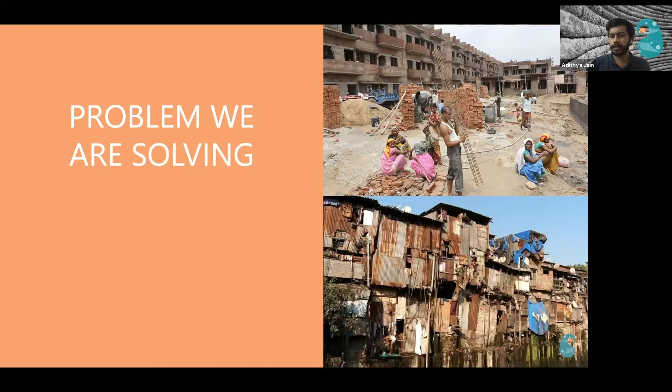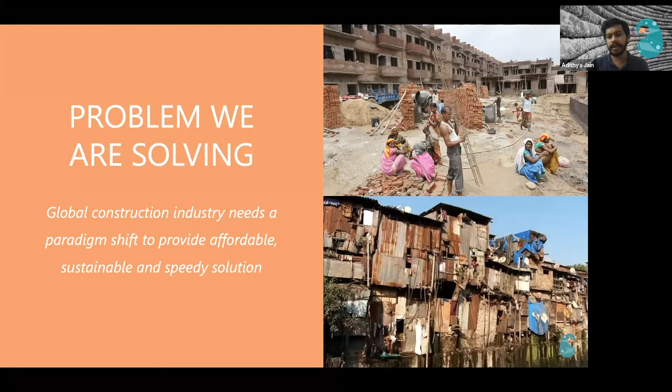India requires about 100 million houses by 2030, and the government is planning to build about 20 million houses by 2022. If we are to solve this problem, it is going to be solved only through technology, and that is where we want to come in. We want to provide a complete shift in the way affordable housing is viewed, and we want to enable that for a majority of India's population as quickly as possible using 3D printing with a sustainable and speedy solution. So that's what we are working towards.

And this is, in essence, what ails the construction industry. If you have looked at the productivity charts, especially in the manufacturing and construction space for the last 50 years, nothing has really changed in the construction space especially. That's because of the lack of automation that has been there in the construction space versus manufacturing, which has quickly adopted CNC machines, robotics, database technologies, and moved forward with its productivity. Whereas the construction industry has been sort of lacking with that.

And especially in a labor surplus market like India, construction has relied on a surplus of unskilled laborers to execute its projects. And this has not been able to deliver the kind of solutions that the affordable market requires. I mean, there is capital, there is land available, but this is one of the very rare industries which is constrained by a supply side problem. So this is what we are intending to tackle with automation.

So I would like to just show you a brief video to just highlight what the problem of housing in India really is.

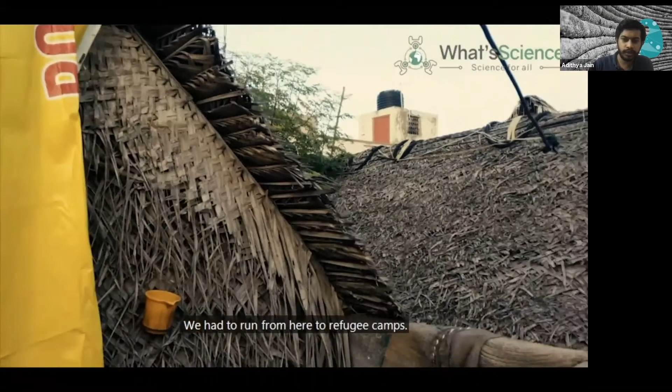The condition of the urban and rural poor in India is extremely bad. The kind of housing they live in leaves them absolutely exposed to the elements, and during natural disasters, they are the ones who suffer the most.

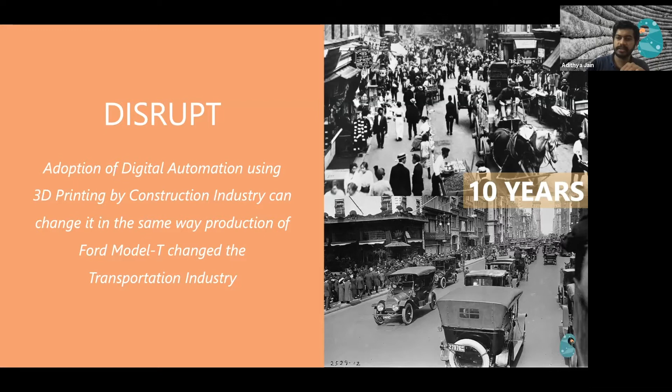It has remained static for a very long period of time. So it would be very difficult for people to imagine what automation in construction can do, but it can drive productivity up really a lot.

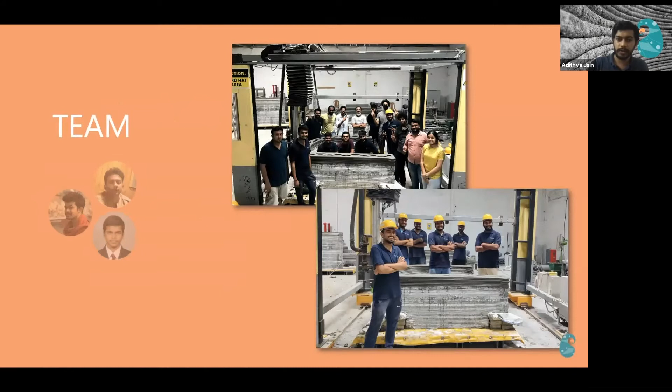And we have a team of 20 very talented engineers who are working across disciplines - mechanical engineering, civil engineering, software, electronics, and also construction strategy. The company, as I said, was started by three of us about 3.5 years back.

So what we are actually building is a mass scale automation of construction, which is customizable. The only thing that you have to change to really print a different design is the BIM file or the digital file. Earlier you had to manufacture new formwork, have new plans for designs, but here nothing is required. You just modify the BIM file, upload it to a 3D printer, and we are ready to go ahead. We are trying to reduce the quantity of materials that we use to make our solution much more sustainable.

And in terms of time, we are delivering an order of magnitude increase. It's not even a percentage increase. And we are working on reducing the cost with scale as well. That is, when we scale up, the cost will continue to reduce.

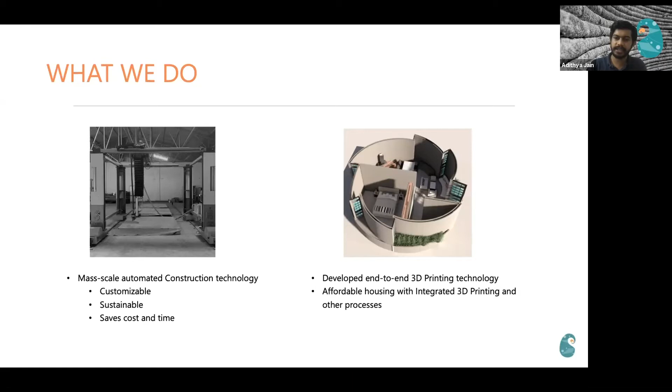And the technology that we have developed is really end-to-end, in the sense we have developed the 3D printer, the material, the software, and other solutions that are required for this. So I'll just probably go through the problems that we can really tackle.

With respect to affordability, there is a problem of transparency and affordability in the market, even within the same geography. Especially in a country like India, there is no transparent pricing for the same structure. And also affordability becomes a problem when things are tied to many supply chains. So this is something that we are trying to change. We want to reduce the cost of construction considerably, to 40%.

Sustainability is an aspect that we are working on, to reduce the amount of material that we use with construction. Productivity, as I mentioned, is the lowest in the construction space, and Indian labor productivity is the lowest among almost all major economies. So that is something that we are working on.

And this is something that we are extremely passionate about, to deliver urban quality construction in rural areas. We want to ensure that there is no distinction between a rural house and an urban house. Anyone who has traveled into rural India will know that the cities are constructed in a - I won't say a very good way, but in a particular way - and the rural houses are just put together. So in that sense, that is a major problem in this country.

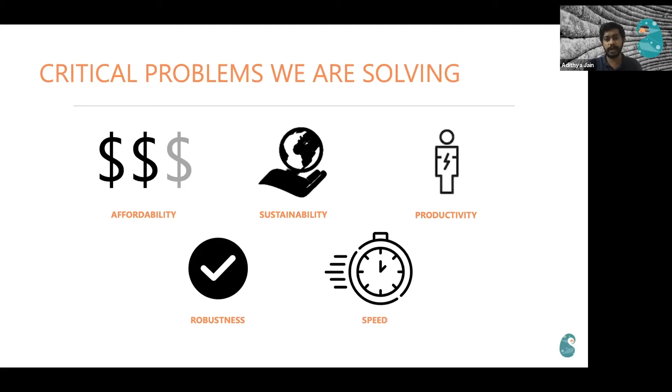And speed, as I mentioned, speed is becoming a problem with respect to government's affordable housing program and affordable housing in general. So I'd like to change that.

We went ahead with this method in the beginning because the supply chains are easier to sort of handle when the 3D printer is hosted within a factory. We are moving towards on-site printing. In fact, our next project is going to be done on-site.

And we have been successful in making our 3D printer supply chain independent. So in that sense, we are able to sort of transport our printer to faraway locations and start 3D printing immediately. And one of the key areas that we can tackle immediately is disaster relief. So that is something that we have a large project on.

So I'd just like to take you through a video as well of our process.

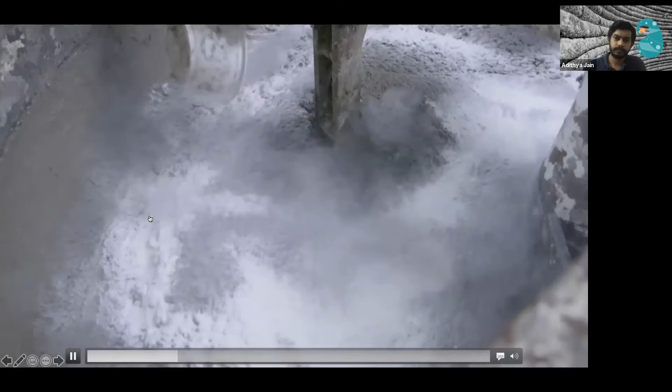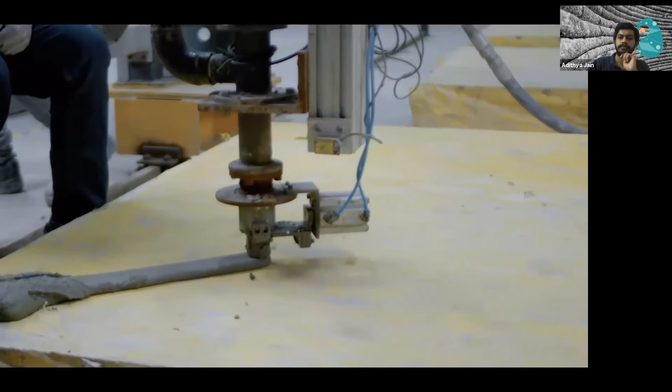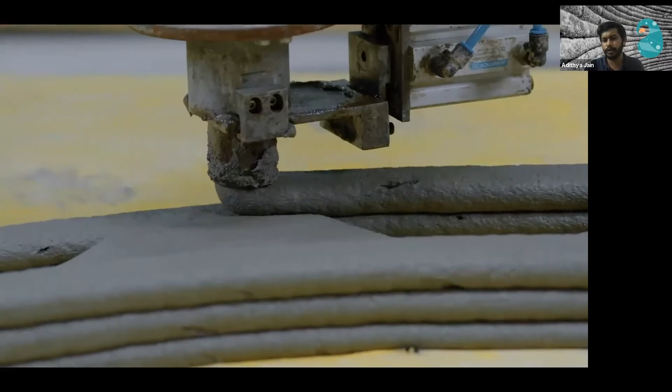As you can see, with 3D printing we can create any sort of form without formwork, without any support material. Hence we are really opening a new paradigm of designs to architects and designers. When designs are constrained by formwork, especially in a market like India, it becomes unviable.

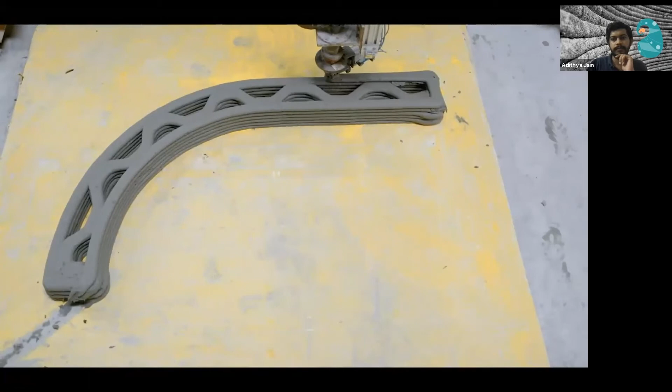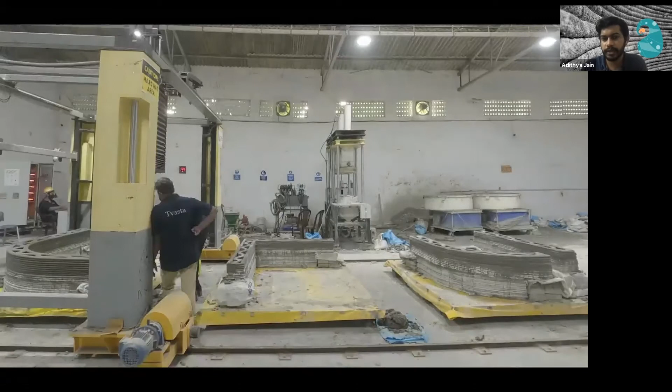One of the key aspects of 3D printing we have been working on is making it affordable. We have tried to make the material as similar to normal construction concrete in terms of cost as possible, and we have been extremely successful. We had to redesign the pumping system and the material delivery system to achieve this. Several of our patents are actually on the material delivery system as well.

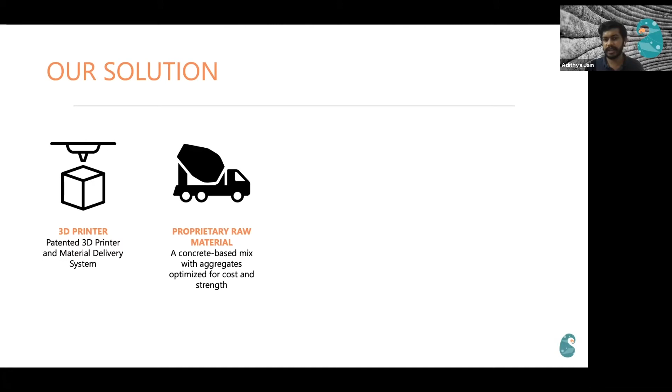So our solution includes the 3D printer, which is patent pending, and a material delivery system, which we have patented. We also have a proprietary raw material. Construction 3D printing cannot use normal concrete because the concrete has to take its own weight while being printed, so we developed a proprietary raw material for this. We are also developing non-concrete materials that we plan to use.

We have developed a software which can enable BIM-led construction. We can take a BIM file, clean it, and use it directly with our software. I have a demo of our software coming up as well.

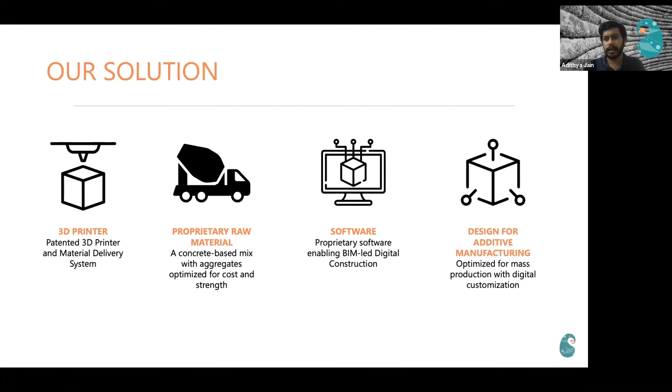One thing we are really working on is design for additive manufacturing. 3D printing offers so many advantages while building something that it would be a shame not to take advantage of that process. For example, in the video you just saw, the modules we were printing were not 100% solid. We could achieve the same level of strength with 45% infill or 50% material that otherwise would be 100% using conventional construction.

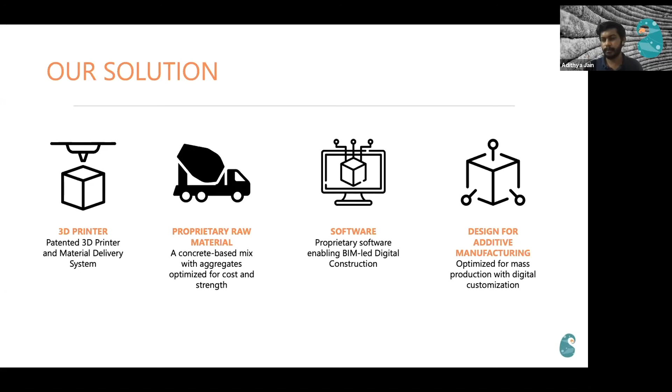So to take advantage of additive manufacturing or 3D printing, some modifications on the design have to be done. We are trying to do this by providing customers that experience, but moving forward we would like to automate that process as well. That is something we are working towards.

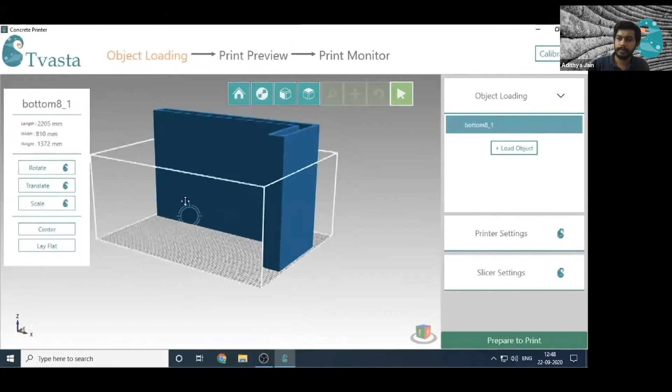This is the software solution we have completely developed from scratch, including the slicing, the viewing, editing designs, and the cleaning of BIM models, which can really enable architects to work with the software much more easily. These are aspects we have done on the back end.

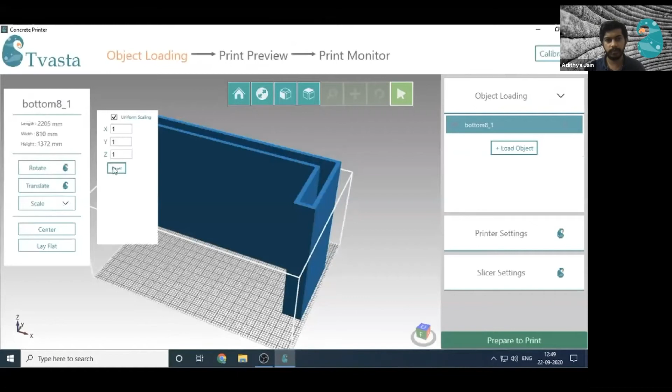The software can also completely track where the 3D printer is, how it is printing, and what amount of material is left. All the feedback mechanisms are embedded into the software itself, with very good data logging and data analytical capability built into the 3D printer. So the 3D printer can correct itself in the middle if there are errors being generated during the printing process, let's say because of abnormalities in the material mix design or anything of that sort.

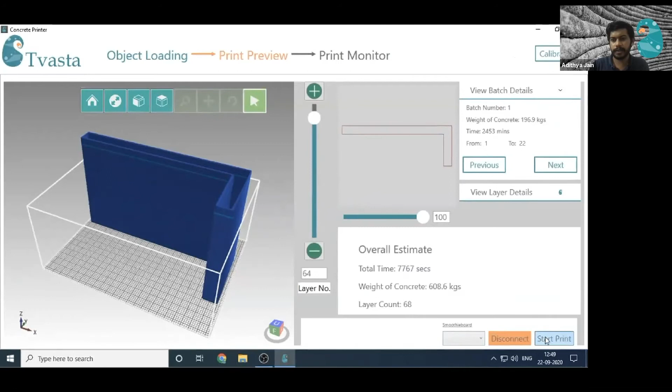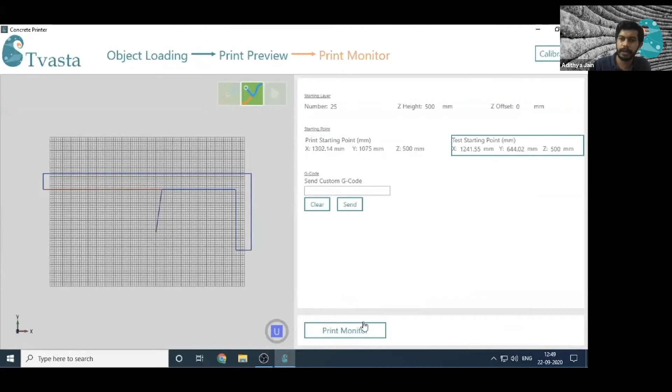And this was completely done in-house by your team? Yeah, so this software was completely built in-house by the team, and we are improving upon it moving forward. We want to enable customers to have direct BIM viewing and BIM interface capability. So this was done completely by the team, yes. That has been the technical journey of the team.

We have 10 more minutes. So do we want to jump ahead into the current work we are doing? There was work in the past, yeah. Based on time, we can come back to this.

I'll quickly say that this was one of the 3D printed structures we did in the past. We had a conference with the Ministry of Housing in India, who are trying to accelerate us through their procedures so we can have regulatory approvals quickly. I'll just skip that particular video.

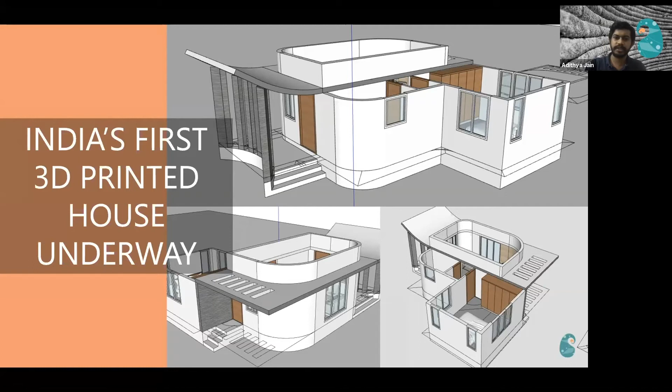We are currently finishing a 3D printed house in India, done in partnership with Habitat for Humanity. This would be India's first 3D printed house, but also a unique structure with several unique shapes and features. We are developing a template for making affordable housing possible in the country. This is a 600 square foot house; 400 to 600 square feet is usually used within the affordable housing space.

So we have a short message from the Vice President of Habitat.

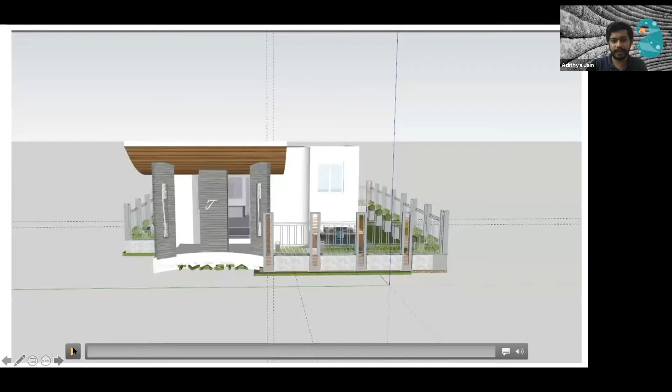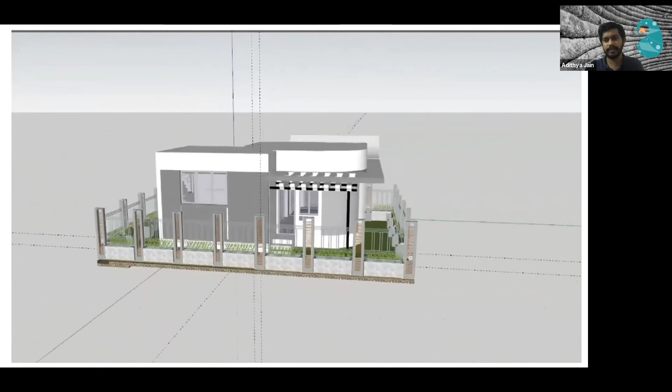I'll show you a short rendering of the house being built and take you through the construction process. This is a unique structure—we wanted to showcase the uniqueness that 3D printing can bring, which is why we've gone for a few irregular shapes. But we've also retained several aspects standard across affordable houses. We're building on this to get regulatory approvals for starting much larger projects in the country. Let me take you through a video of the construction process.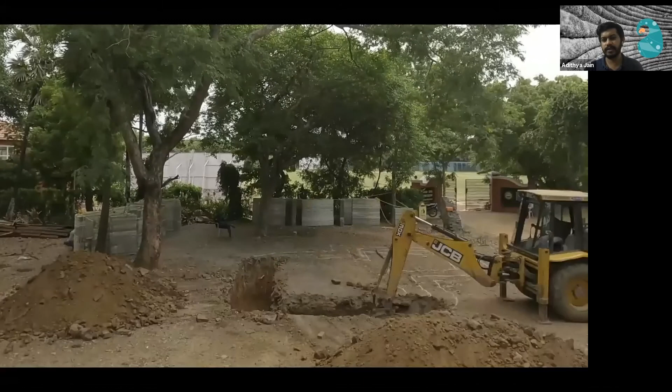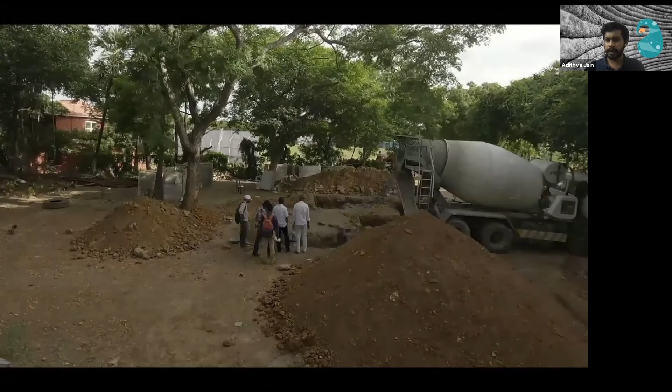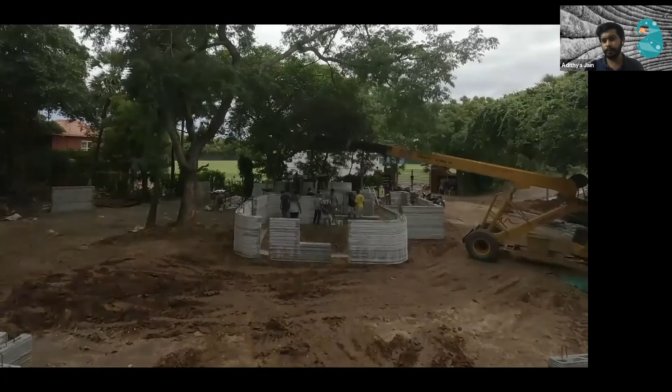This is an off-site 3D printing project, meaning we've built the modules within our factory environment and will be assembling them. Our next project is on-site. Off-site 3D printing has advantages because in Indian urban and rural scenarios, not every site is accessible with a 3D printer. So off-site 3D printing will have a major role going forward, especially for large-scale production. If 50, 60, or 100 structures are being printed at a time, off-site 3D printing would be the method to go.

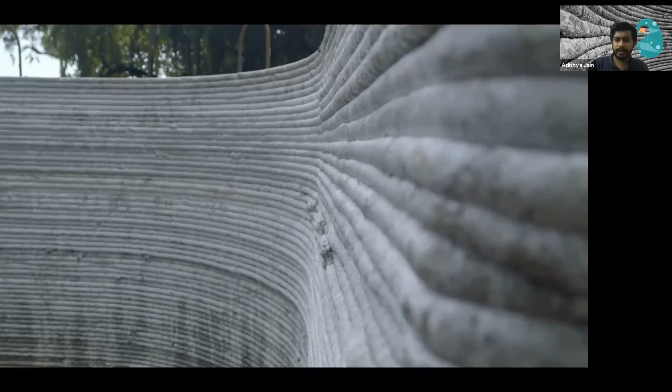There have been disruptions to our construction process due to COVID. A few people tested positive and we haven't been able to finish it, but we're planning to finish it within the next 5 to 6 days.

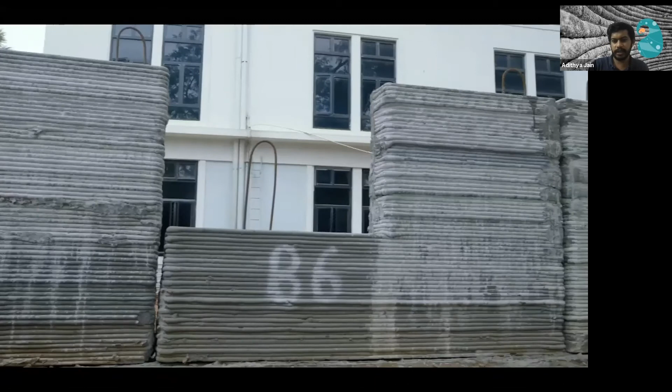The modules will be locked together using a dry joining process. It's a very simple procedure—all the provisions for joining the modules together have been provided.

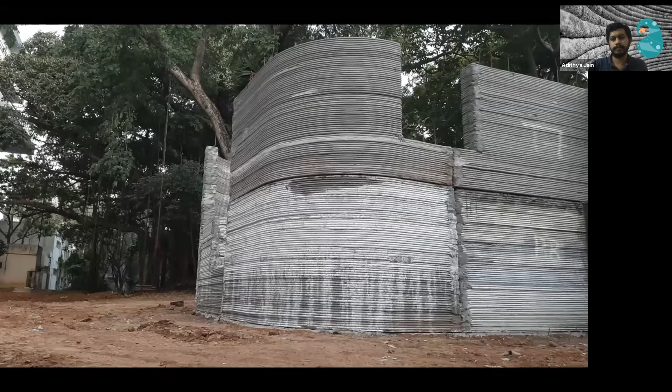Moving forward, we're integrating finishing processes into our 3D printing as well. Here, finishing is done conventionally—plastering, etc.—but moving forward, the printer itself will be able to take care of that. That would be a huge advantage because it's a very skill-intensive, costly process. By reducing that, we're planning to reduce the cost of construction quite a bit.

So what you mentioned about other sorts of printers—the on-site printers and others you're looking at—can you walk us through what else you're planning to do going forward?

Moving into the future, we have a new project coming up which will be a much larger structure, and we're planning to do it on-site. This would be another project in Chennai, done using on-site printing. But one thing we're really convinced about is that in a country like India, you require a combination of both on-site and off-site printing, along with a few integrations with 3D printing to really make affordable housing viable.

We require finishing processes to be integrated into the 3D printing process, so that when the module moves out of the 3D printer, or when the printer moves out of the construction site, it's not just the superstructure that's built, but all the other elements required to make a house livable are also done along with the 3D printing process. That's something we're convinced about.

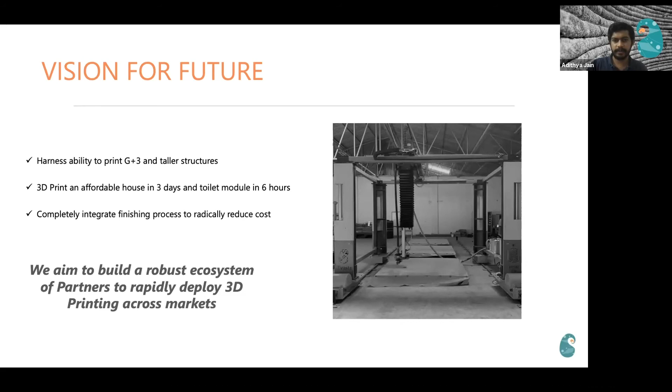In terms of scaling up, one of the things we are very passionate about is not just scaling for urban markets but also for the rural market, which is very important for us moving forward. Making construction affordable and transparent is very important for us. Transparent in the sense that pricing is extremely opaque in the Indian construction space, even within the same geography for the same kind of structure, and making it affordable with integrated finishing. We have certain collaborators who would be able to manage several aspects of construction that we are not intending to get into.

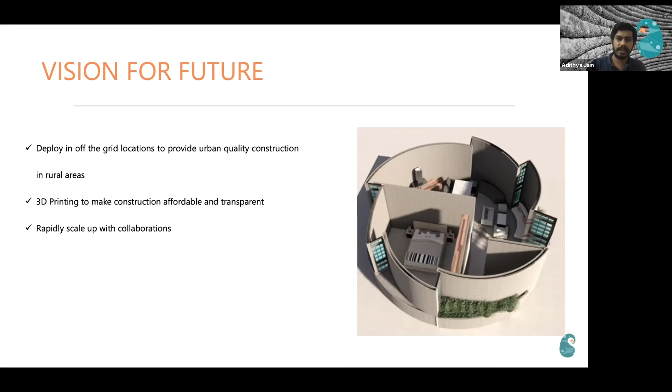Construction, as you're all aware, is not just about building a structure. There are legal aspects to construction, there are financial aspects, there are permissions, etc. So we have tied up with a few partners who would enable us to scale rapidly, who are already in the construction space and have that scale. So this is where we are right now, and very exciting times ahead.

That's really wonderful. So in your past projects beyond that structure, you also had some toilet modules and others that were built, right? We didn't have time to cover those aspects. So that's really wonderful.

Anything else on going beyond India for opportunities outside? And anything on how you are different from others that are out there? There are probably other people offering such solutions also. Any thoughts on those?

On the toilet module, toilets in India have seen a massive change with respect to availability, with a massive push from the government. We work with one of India's largest construction companies to enable toilet 3D printing for their CSR mission, and that project is slated to scale up quite soon.

On expanding beyond India, we do have a couple of markets we are looking at. Southeast Asia is one, Africa is certainly somewhere we see potential, but we would like to partner with other companies to go into that market, as that's not really somewhere we have capabilities. Middle East is also something we are looking at, with a few proposals around the affordable housing space. Africa and Southeast Asia have massive requirements, so that's something we are working towards.

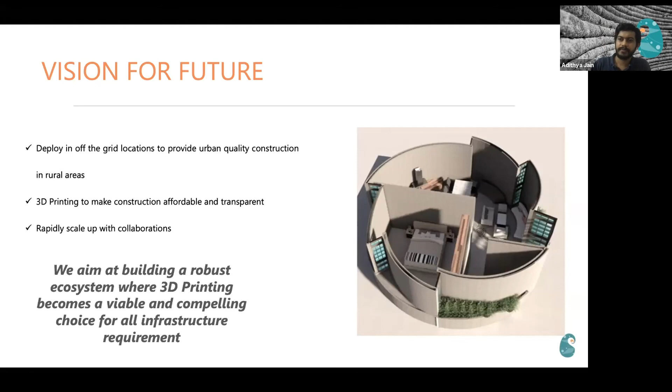Okay, that was right on the dot. Thank you so much, Aditya, for sharing this exciting journey, and all the best for a great future. Back to you, Matthew. Thank you, thank you for your support.

Aditya, Meera, I really appreciate you taking the time. The theme of our summit is innovation to save the planet, and I think this is a perfect way to wrap up all our sessions. I really commend you, you're doing a great thing, and it's very good to hear about what you're doing and all the exciting things you're doing to try to save the planet. So thank you. Thank you. Thank you.